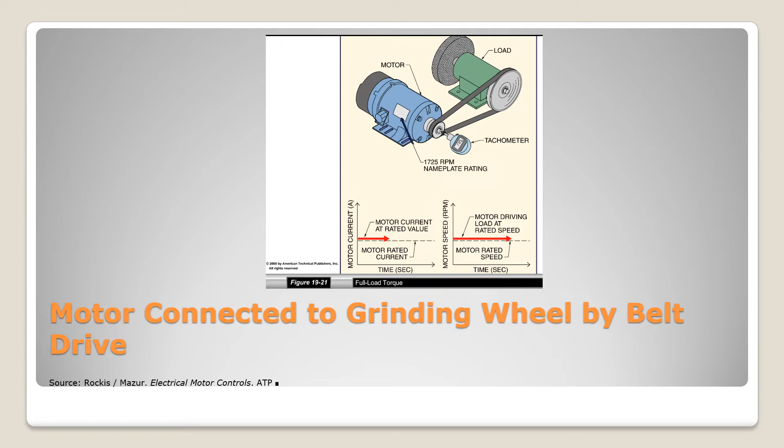This pulley and belt arrangement is sometimes called a drive system, and there are lots of drive systems as we talk about mechanical systems going forward: hydraulic drive systems, belt drive systems, chain drive systems, direct drive systems, a lot of different options. Just as with switches, there are hundreds of different kinds of drive systems, each with particular strengths and weaknesses, so picking the right drive system is really important.

Then we have a direct drive system. Here we have a motor connected with a coupler, so there's no gear, no belt, no pulley. The motor turns at exactly the same speed as the pump because the two shafts are connected directly, in this case by a flexible coupler.

Now, if you think about this, we have to always think about what happens in this situation, because we want to have this thing properly aligned. Particularly if you're in a mechanical discipline, we're going to talk about alignment a lot going forward. But alignment essentially is how the motor aligns with the shaft of the thing it's driving.

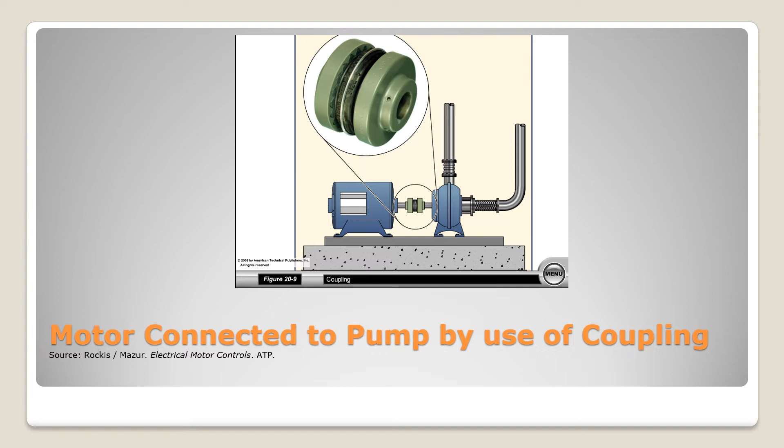Imagine this pump is pumping a cold liquid and the motor is driving that pump. If the motor and pump are connected perfectly at room temperature, when we start the system, the motor is going to get warm, causing it to grow a little bit and move up slightly. The pump is going to cool because it's pumping cold water, so it's going to shrink slightly. This flexible coupling gives us the allowance for that little movement, a little room for margin, giving us the flexibility to maintain acceptable alignment between the pump and the motor even when there's that slight shift.

A pump is just a device that uses kinetic energy to create pressure energy. If we look at this pump on the left, we see the inlet of the pump. Fluid comes in and is accelerated by the impeller, which is inside that larger blue section, and that fluid accelerates out of the volute.

When we accelerate something, we increase its velocity, and as we increase its velocity, we increase its kinetic energy. As it leaves the impeller and goes into that expanding volute, that kinetic energy is converted into pressure energy, and that's all a pump does. You've heard people say water can't flow uphill—well, it can't, unless we give it some pressure energy, and that's what we use pumps to do.

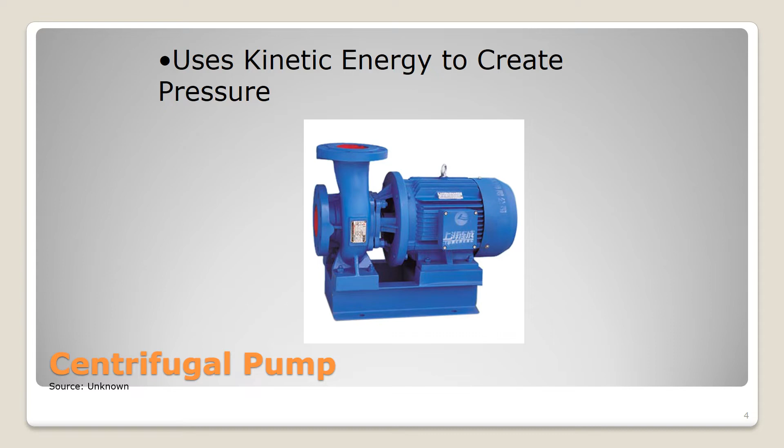Here's a cutaway of a pump similar to the one we just looked at. You can see the suction nozzle again on the left, and you see the impeller, that's the piece that physically spins. Then we see that volute, the expanding area where we go from kinetic energy to pressure energy.

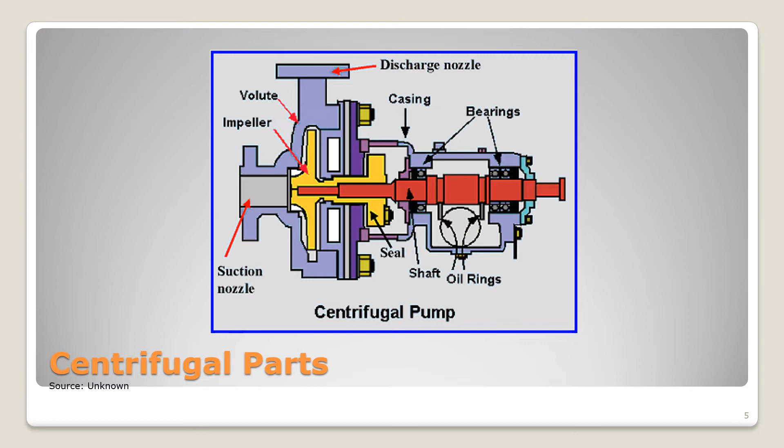To the right, you'll see the bearings and the other elements of the drive system, and all of that simply supports the shaft and provides it with lubrication. The bearings provide both physical guidance, keeping the shaft straight and keeping it from moving, and also provide a reduced friction surface for the shaft to turn on.

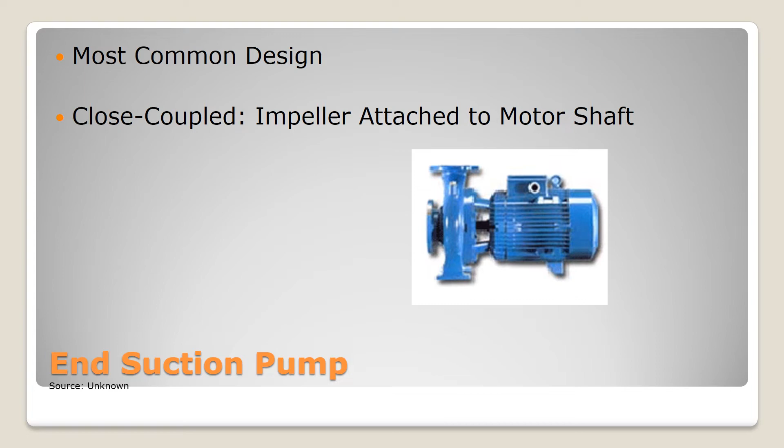Lots of different designs. Certainly the centrifugal pump is the most common design. Here's a close coupled one where the pump is physically mounted to the face of the motor, and the impeller is connected directly to the shaft. But there are just as many designs as you can possibly imagine.

Here are a couple more. Here we actually have some sort of coupling between each one of them. You can see the motor is on the left on the one at the bottom, and the pump is on the right. You see the orange coupling cover, and that cover is there for safety and protection, so you don't have that spinning coupling making contact with a person or a piece of equipment. We have the coupling guard that's nicely orange on that one. In the upper right, you see another coupling guard, but this is a pretty typical frame-mounted pump.

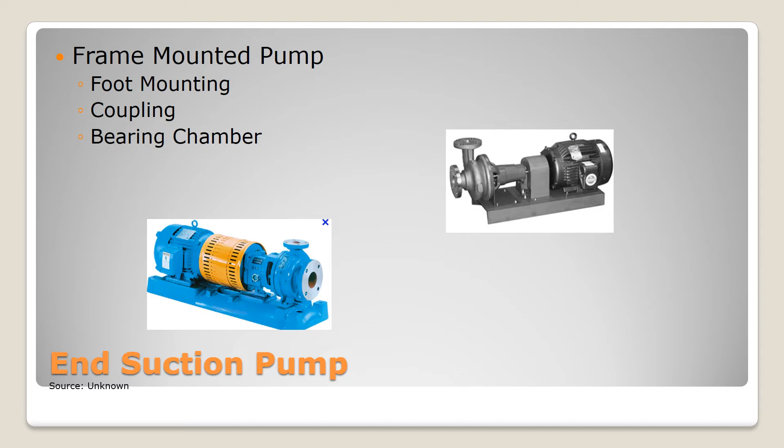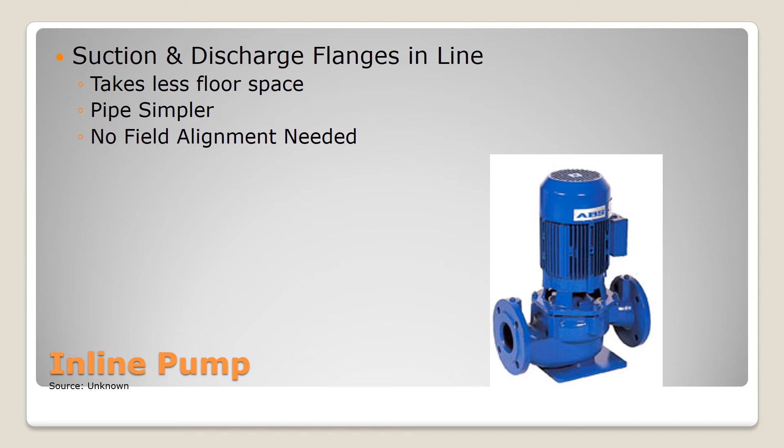Here we have the inline pump. In this case, the motor is mounted above the pump. We have suction and discharge to the left and right. In this case, there's no real alignment issue because the motor and the pump are physically connected, so if one moves, the other one moves, and they have to move together.

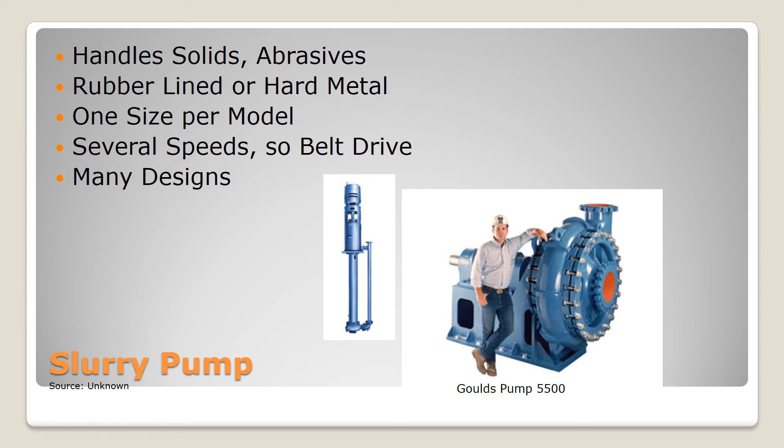Just because the pump is large or small doesn't necessarily mean how much pressure it produces. So pressure and volume are two different aspects of pump sizing. You can have a really small pump that produces really high pressure, or a really large pump that doesn't actually produce much pressure but moves a huge amount of fluid. So a lot of different types of pumps.

If we have fluid that's moving around, we probably need to control it, and we're going to do that with valves. Just as there are a lot of different types of switches, motors, and pumps, there are lots of different types of valves. We're just going to introduce a couple of ideas here.

This is a three-way valve. In this sort of arrangement, you have the ability to take one flow source and shift it from one direction to another.

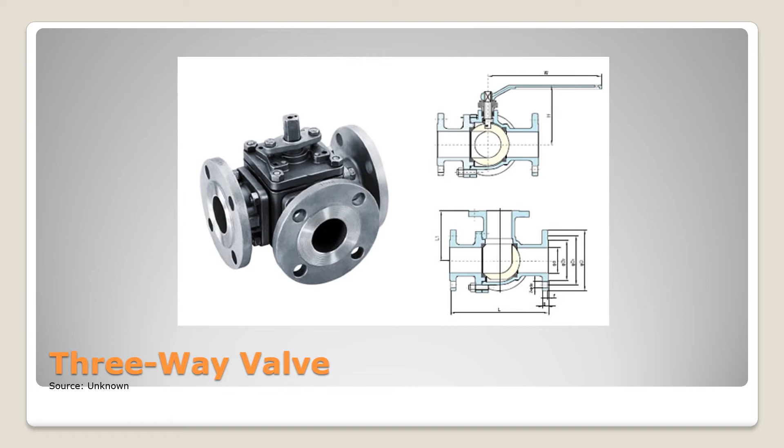We have a four-way valve. This is another kind of specialized valve where you could have two different flow sources where flow could either be mixed or used in an either-or situation. Think of it like a mixing tee.

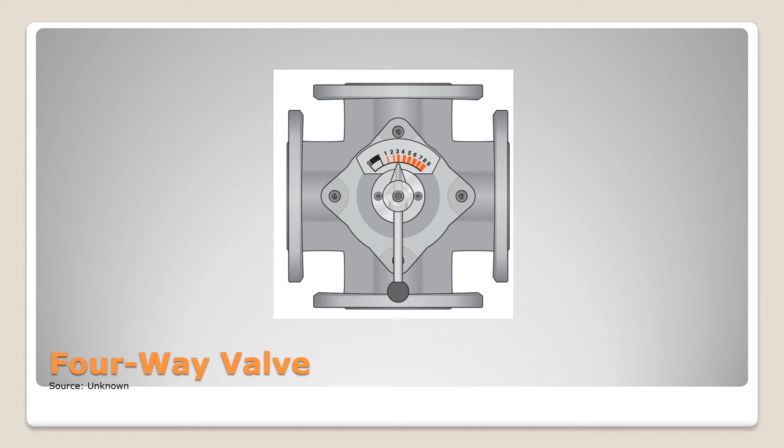A quarter turn valve. You probably have one of these in your home, frequently on water lines or gas lines. It's called a quarter turn valve because it goes from fully open to fully closed in a 90-degree, or one quarter of one turn.

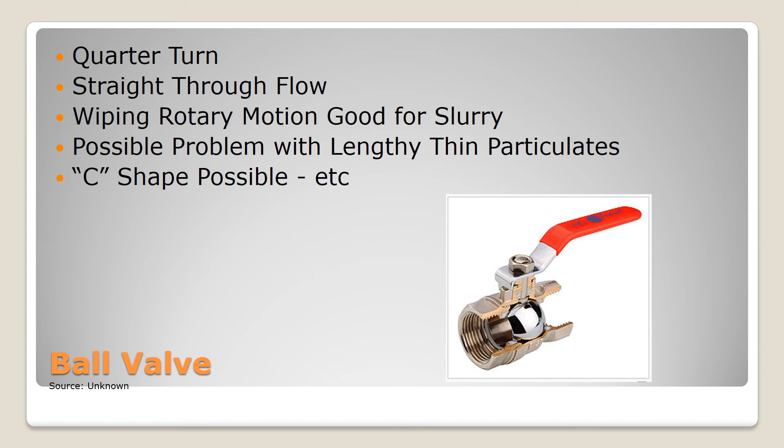If the handle is installed properly, you always have to check, sometimes they aren't. If the handle is in line with the pipe, the valve is open. If the handle is perpendicular to the pipe, the valve is closed. These are really good for shutoff purposes, in other words, to stop flow. They don't control flow well and aren't very good at throttling, but they're very effective at stopping it so you have good isolation.

Several different groups of these types. We have the wafer type here. This is the concentric, where we have a disc that's actually in line with the body, or an eccentric, which is where the disc is offset from the body.

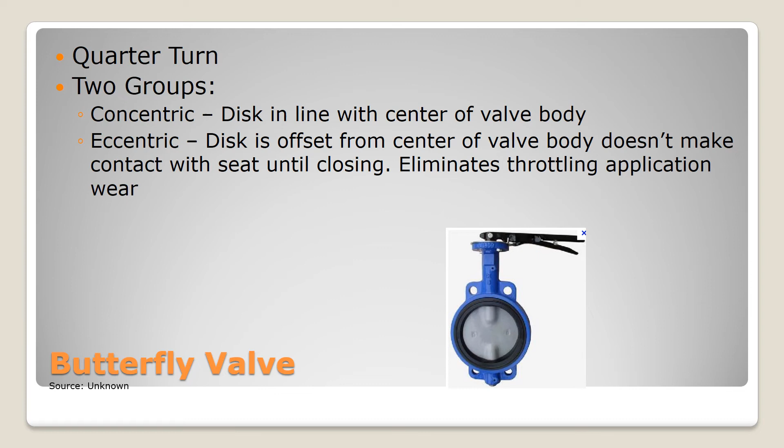Both of these are pretty good at shutoff. They're really not all that good at throttling. An eccentric can be used for throttling if you have to. It's not really desirable, but it can work.

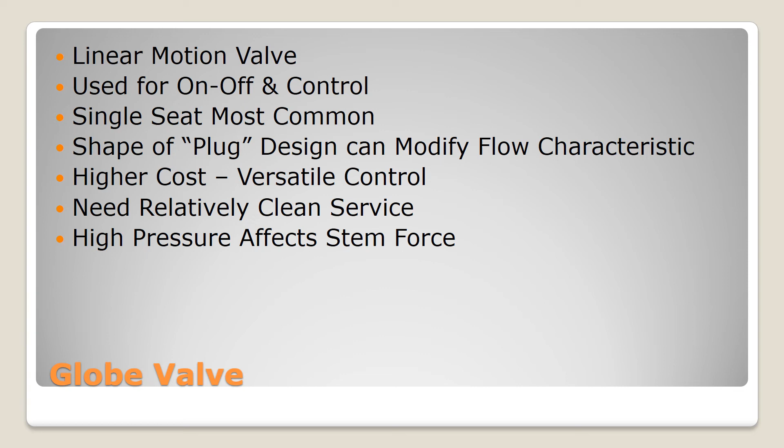All sorts of other valve types, linear motion valves that can do on-off control. There are valves called plug, which is really a type of globe valve, and they're really good for control. We'll look at this globe valve idea here in just a minute.

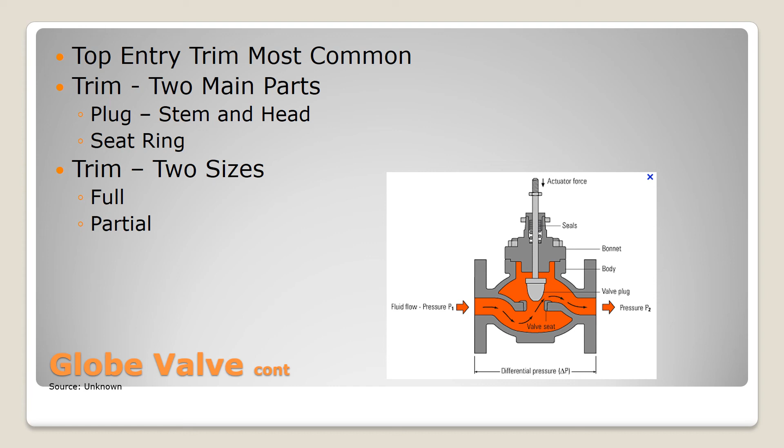The beauty of a globe valve is we can move it up and down. It can be partially blocking that hole. If it's partially blocking it, then we get throttled flow. Globe valves are really effective at throttled flow.

These are really good for isolation. They're not very good, they do not throttle well. So we're going to use these typically in on-off applications. We want to be able to have full flow or no flow at all.

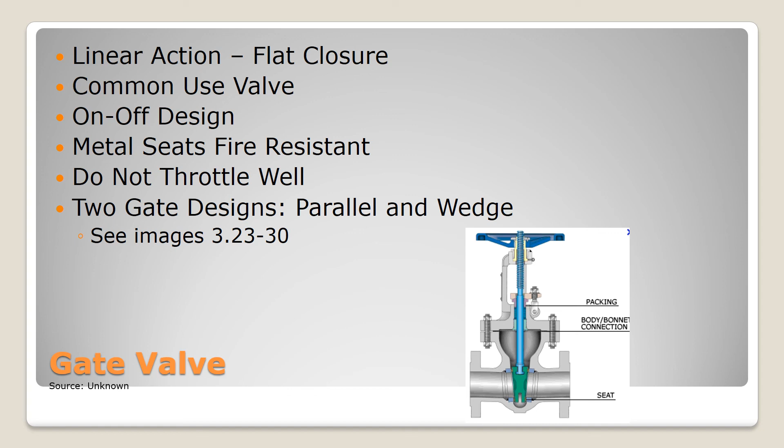Here's another example of the gate valve. This is really just an enlargement of what we saw before. Here we see the seat, the gate, that's the green thing. We have the stem, that is the blue vertical line, and we have a hand wheel up at the top, and you see some threads.

So when you turn the hand wheel, it has those threads on it that act like a screw. It pulls the disc up away from the seat, so now fluid can flow through the pipe. When we turn it the other way, toward closed, it drives the disc back into the seat, and now we have blocked flow, and we have shut off our flow process.

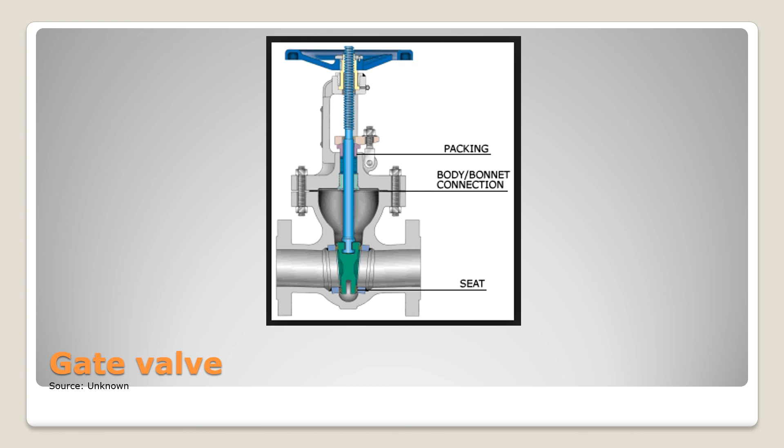So once you get used to them, you'll be able to identify a gate or globe valve on site. So there's a fundamental quick overview of valves and valve types, all of which are part of mechanical systems that generally consist of pumps, pipes, and valves.